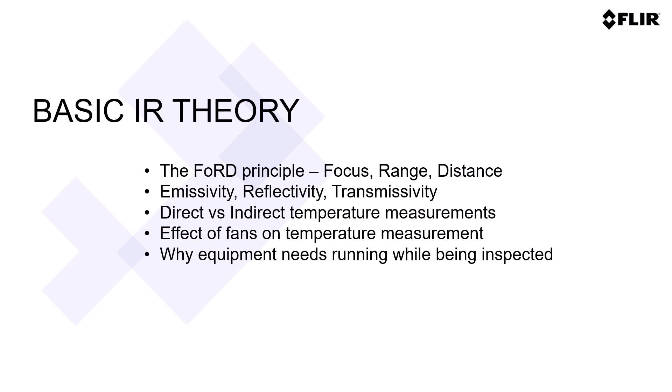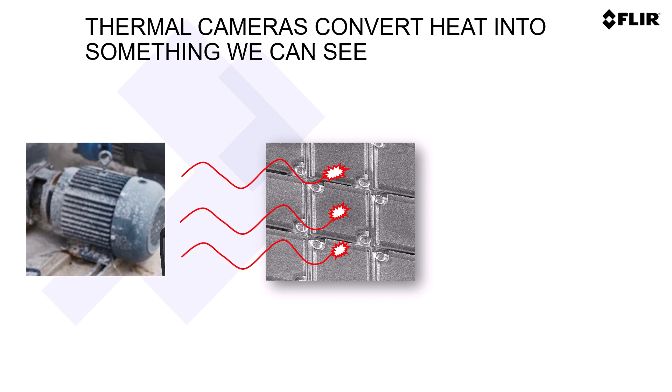Let's begin with how an infrared camera works. Thermal cameras convert invisible heat wavelengths of light into something that we can see and measure. These light waves are focused onto a special kind of detector called a microbolometer, which is similar in some ways to a regular digital camera in that it is made up of an array of detector pixels. The camera electronics then calculate temperature values for each pixel, and the result is displayed as an image.

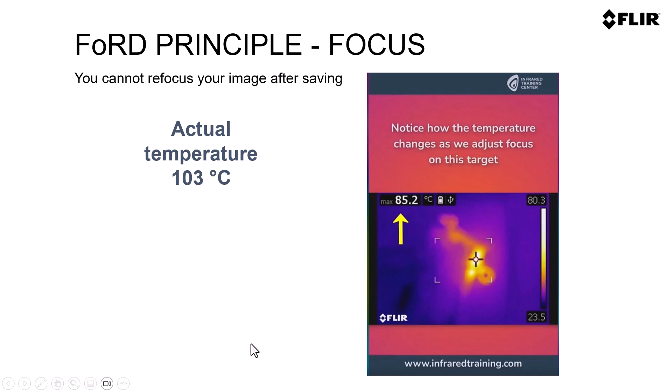There are three things the thermographer must do that cannot be changed after the image has been saved. We often refer to this as the FoRD principle. F is for focus. The target must be in focus and without image blur when the image is captured. Otherwise, you will not have a good understanding of what the image is telling you, and your temperature measurements will be lower than in reality.

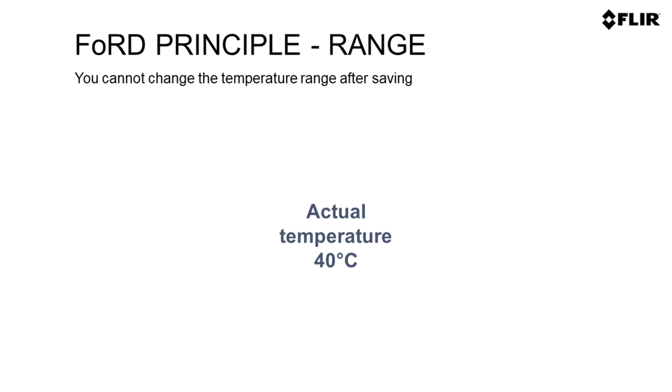R is for range. The camera must be set to the correct temperature range. T-Series cameras have 2 or 3 temperature ranges. For most applications, the lowest temperature range is the proper one to use. D is for distance. You cannot change how far you stood from your target when you save the image, so you must ensure you are standing an appropriate distance from the target in order to have enough pixels covering the target you need to measure.

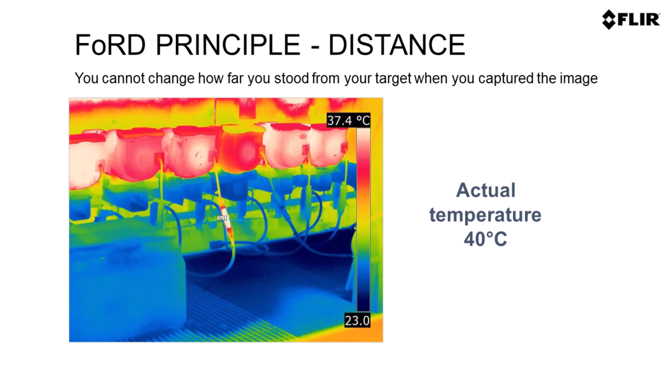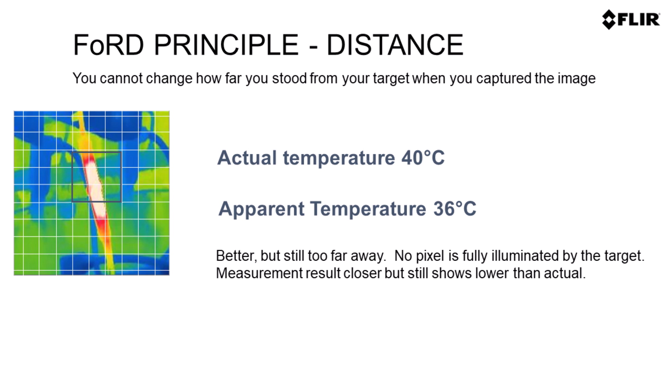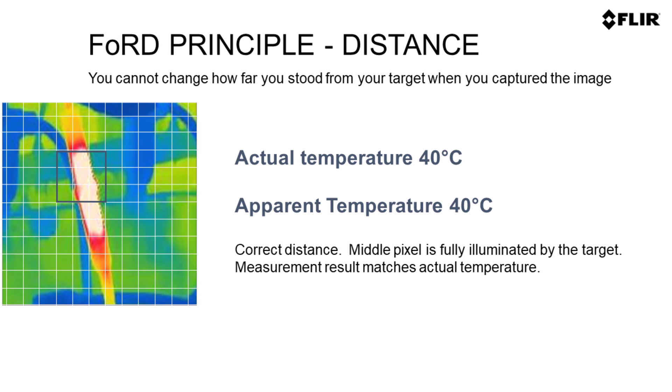Let's look at a real issue with a known temperature of 40 degrees C. When we are too far away, the object size in the image is less than the width of a pixel. That means the pixel is not fully illuminated, and as a result measures a value much lower than 40 degrees C. When we get closer, the measurement improves. Now the object almost covers a full pixel, so we read a value that is closer to the actual temperature. Finally, when we get close enough so that the object is larger than a pixel, now we can read the actual temperature of the target.

Emissivity, reflectivity, and transmissivity. The camera is gathering heat energy in the form of light wavelengths from 7.5 to 14 microns and focusing that light onto a detector. The light being gathered is either being emitted by an object, reflected off the object, or transmitted through the object. Emissivity plus reflectivity plus transmissivity equals 1. Most objects are not transmissive, so the energy is either emitted or reflected in most instances. Typically, rubber, plastics, paint, and oil will have high emissivity with values above 0.8, and shiny metals will have very low emissivity with values less than 0.2.

Think about getting into your car that has been sitting out in the sun. If you reach your hand toward the dashboard, you will feel the heat being radiated from the vinyl or leather surface because those materials have high emissivity, which means they radiate heat efficiently. But if you reach for the shiny chrome-plated steel belt buckle, you may burn your fingers when you touch it. That is because that material has a low emissivity and does not radiate its heat very efficiently.

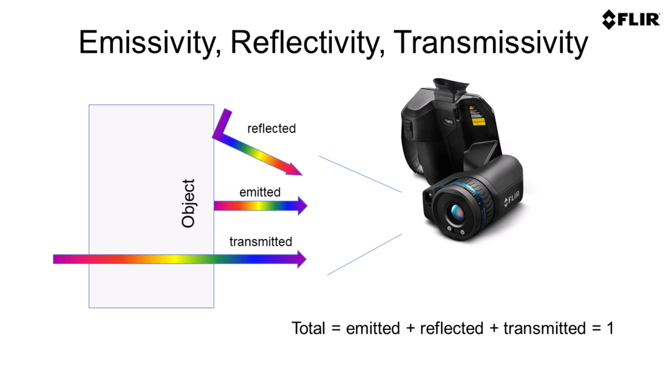You should be selecting an appropriate emissivity for the target you are measuring. Your camera has a built-in table of emissivity value settings to help with this. It's important to remember it is the material on the surface of the target we are concerned about, not the materials and the components beneath the surface. If safe to do so, you can use a piece of common 0.95 emissivity 3M electrical tape applied to a surface to compare your readings to a known emissivity location, or to measure the emissivity and reflectivity of the surface as is taught in a Level 1 thermography course.

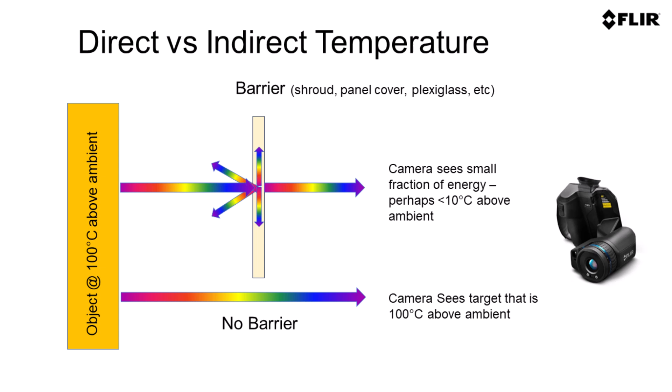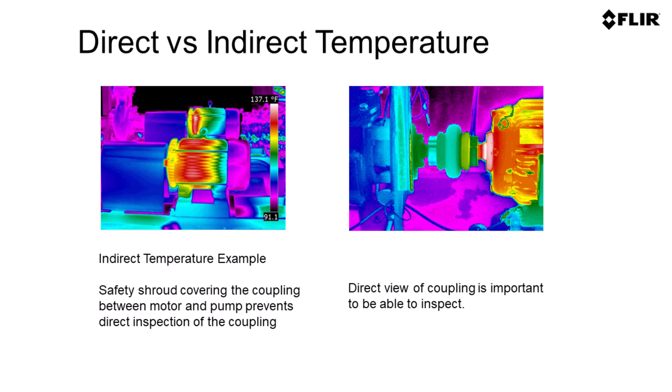Direct versus indirect temperature measurement. A direct temperature measurement is when we have a direct line of sight on the object that is generating the heat. An indirect temperature measurement is when we have a heat-generating object and it's hidden behind something, preventing us from having that direct line of sight. An example might be a faulty bearing that is heating up due to friction. If we can see the outer surface of the bearing, that is a direct measurement. If the bearing is enclosed by a safety shroud and we cannot measure its surface directly, that is an indirect temperature measurement. This concept is important because risk assessment based on temperature rise is normally based on direct temperature measurements.

Effect of fans on temperature measurement. Fans move air across surfaces. When that happens, heat is conducted from the object surface to the cooler air molecules, which are then stripped away by the air movement. The net effect is that fans really do work to cool the surface, and this will show up in the temperature measurement. Therefore, it's important that when performing thermography on an asset, it is always operating in the same way, and it's best if any fan cooling the object is subjected to is turned off temporarily while the inspection is being performed.

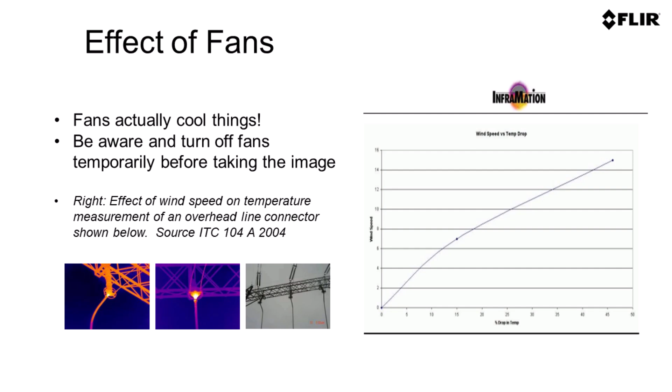Why equipment needs to be in normal operation. Equipment being inspected must be in operation during the inspection. Whether we are looking for signs of electrical resistance or mechanical friction, these signs will not be there if the equipment is not under load or not moving. Mechanical equipment such as belts, bearings, pumps, motors, etc. should be running for at least 1 hour prior to inspection.